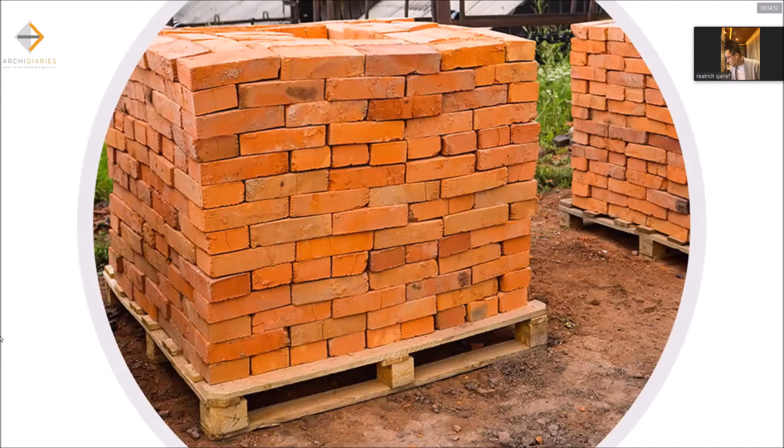So first of all, the language of brick. One brick costs about 0.1 dollar, 10 cents per brick. But when we come to various bricks, it's happening - when we have the good grade of brick, it's like 0.3 US dollars per brick.

So when we see this, the bricks become - the philosophy becomes a wall that is alive. This project is called the gateway to spirituality, in this kind of reflection to the retreat. The owner is really, really generous.

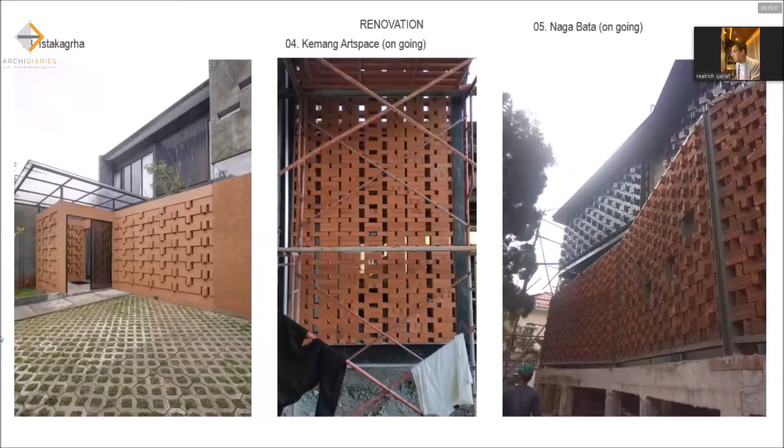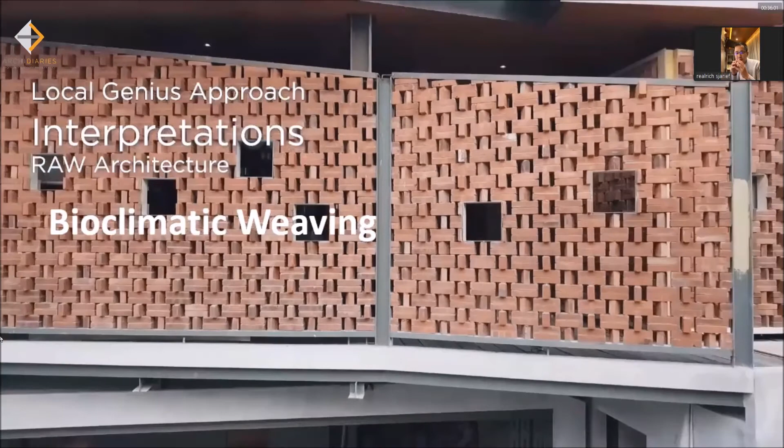The weaving language actually lets you create not only aesthetics, but also sun shading towards the space, involving the art of constructing the brick.

By understanding that, we only create using perforated steel, which is usual, not industrially cut. And we can create simple massing, using primitive structures, meaning primitive massing.

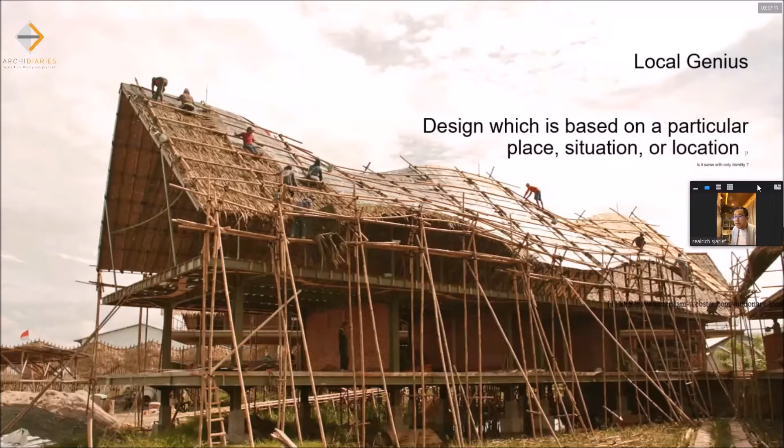So that's the kind of language that I think is one of the keywords I want to start with: local genius, which is design based on a particular place, situation, or location. And that itself is sustainable architecture, I think.

Many people say it's political, many say it's just a jargon or just branding. But for my side, it's not. When we say the goal is sustainable architecture, we already have this kind of awareness.

The idea is all about the limitations imposed by the state of technology, and it's already an organization of the ability to organize to achieve the needs of the future generations after us.

So I will start to present 3 projects and 2 more epilogue projects that I want to elaborate here. The first project is called the Guild, which means the craftsman guild, involving the situation around our studio.

This story is all about the red ant and the black ant. The red ants can be offensive when threatened, but the black ant can defend against attack by running very fast.

So that kind of continuum, I think, is part of our mind - sometimes we need to be aggressive, but sometimes we run and need to adapt to the situation. So the symbol of the nest itself is all about the defense mechanism.

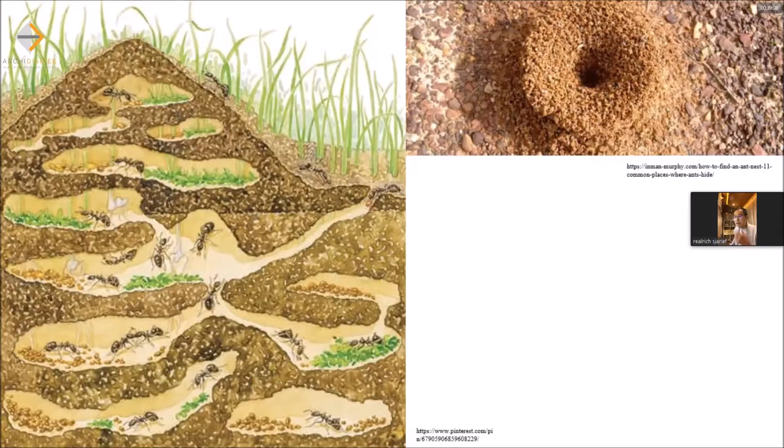By having that, I will start before the Guild projects - we started the project in the garage, in the middle of a gated community, with the discrepancy of high density and low density.

So this is the house - and beside the house, it's actually a very functional house. This is the entry of our garage, which means we provide the studio with many books, with material catalogs, trying to understand.

This is like 10 years ago when we didn't have so much space, and we just made use of the space. Along with this, it was just young people, not senior people.

A lot of people who just helped my grandfather and my father hadn't joined the studio at that time. Just after 2 or 3 years of the formation of our studio, we had the chance to be together again.

So by having that, the situation was quite intense, and we formed this kind of tubular life along the old buildings. We had discussion time forming modular structures by plywood.

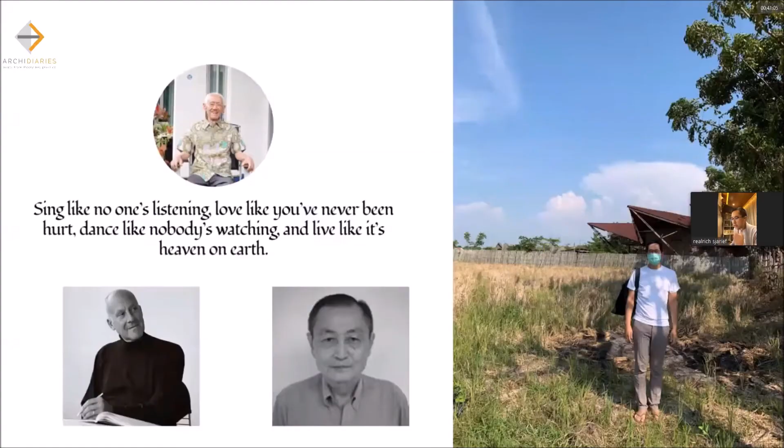We create what's available with the carpenter. So we hired two carpenters who help our studio as a way to service the client as well. By having that kind of language between the people who can make the carpentry works, we're already quite creative in the matter of how to make the designs.

Looking for the people doing research through the manuscript, and including Lord Norman Foster as well. It's like a catalog updated every year, doing archiving for his work and evaluating with the critics.

My father always said, if you have problems, always go to the basics. So you need to always strive for excellence by doing a good process.

From all three of them, we can say it's kind of coined by my father, like: sing like no one's listening, love like you've never been hurt, dance like nobody's watching, and live like it's heaven on earth. By having that, we can have this kind of chemistry between us, a chemistry of respect.

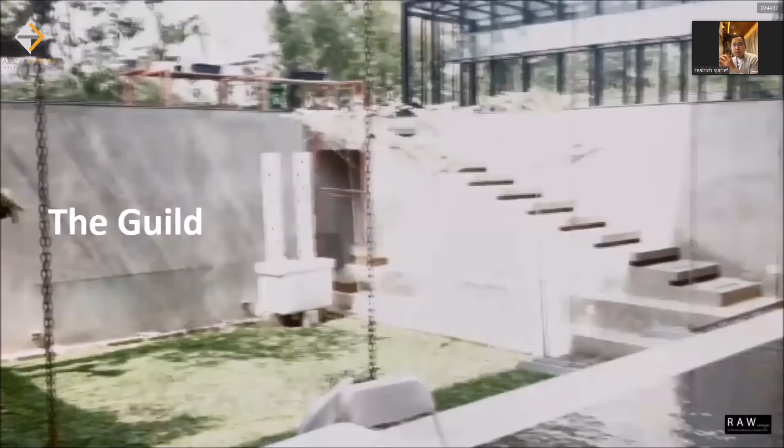But by having togetherness in thinking together, thinking through together, I think these compositions make it quite beautiful in the process. We are not aiming for the products, but in the process we can see these explorations help us make more experimentation in the tectonics grammar.

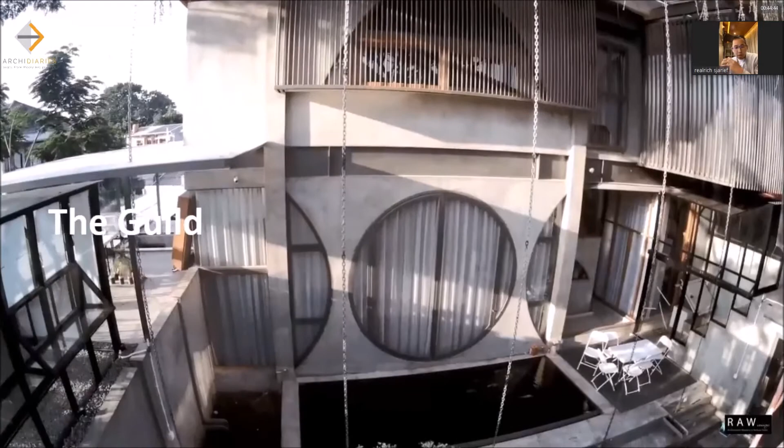We see this as a combination between complexity and a lot of contradictions between one to another, and we can see this exploration coming to primitive compositions like an arc, a triangular form. From that point of view, we can have a combination between big massing and small massing.

In order to get that, we create a more progressive methodology from the massing to the materiality, and we can talk about it later, like a 7-step methodology.

When we talk about the methodology, when you see something like this, nobody will not smile. Everybody will smile, looking at the story of process, the story of happiness along the team, and the story of the process of making architecture. That's what we try to celebrate in this kind of bricolage.

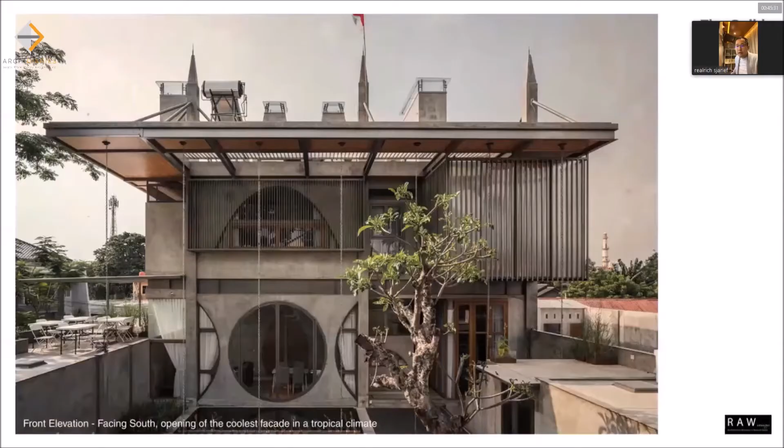When we say this is the south side, we can open the opening to the tropical climate. On the left side is the north side, and in the middle we have an atrium.

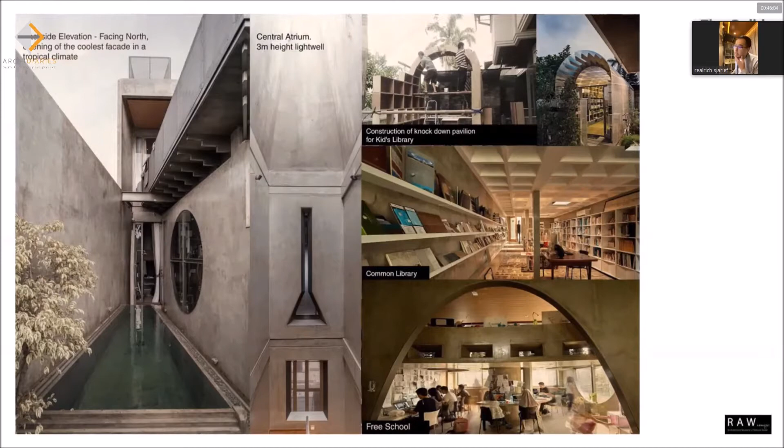These compositions are the plywood summer pavilion, which was actually moved to this new location, and it can still be used. It's already been moved 4 times, and there is a common library and free school inside the guild, as part of the internship programs.

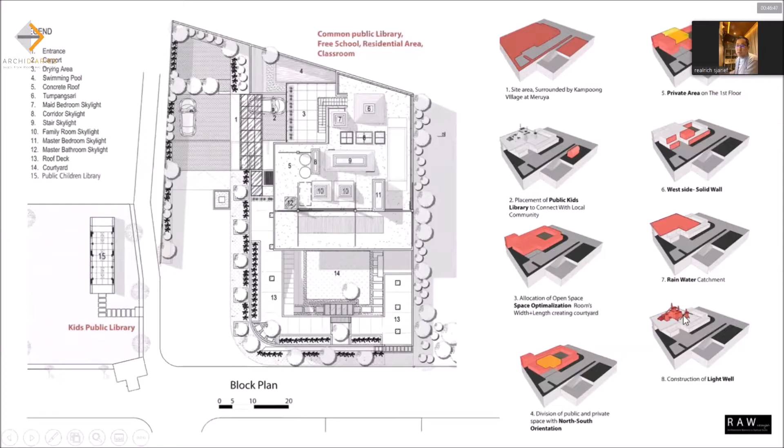This is the construction of a light well and rainwater catchment. This is the sketch of the building from the west side, and you see the facade is actually solid, no openings, only openings with perforated panels here, just for people to sneak a peek outside to the studio.

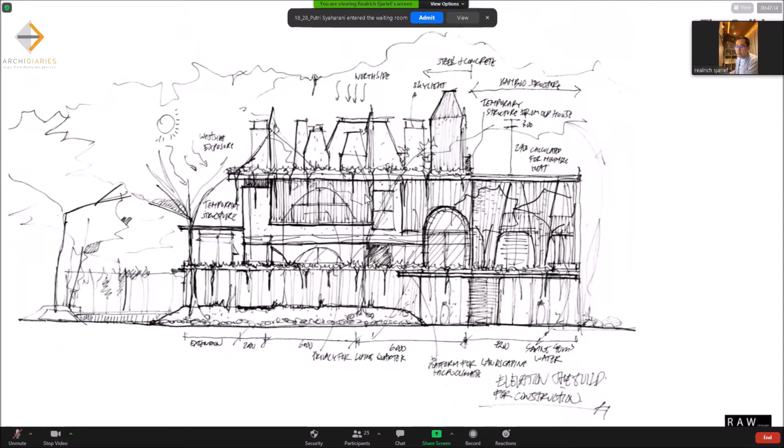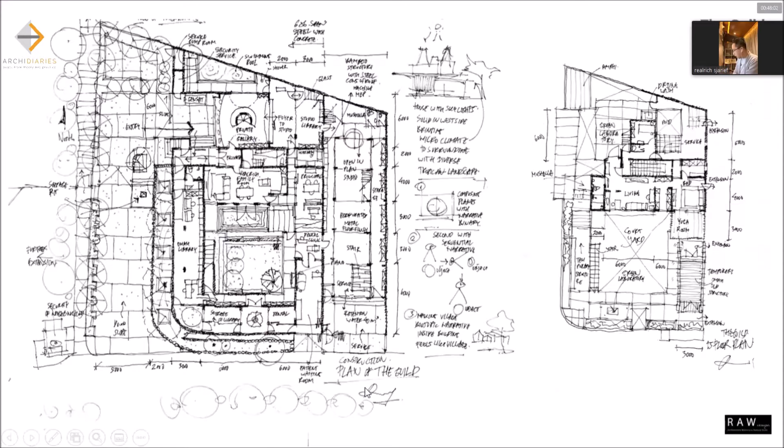So this is the construction process when we try to have the locality, like steel workers constructing things on site and in the factory. By having that kind of attitude, we can have a bricolage using the interpretation of the vernacular constructions, like this thing the craftsman never done before.

This kind of light well going through the buildings, so by having this kind of thing people can appreciate the architecture through the lights and through the construction techniques, and through not only the forms outside but inside. So it's more essential, not only the literal things.

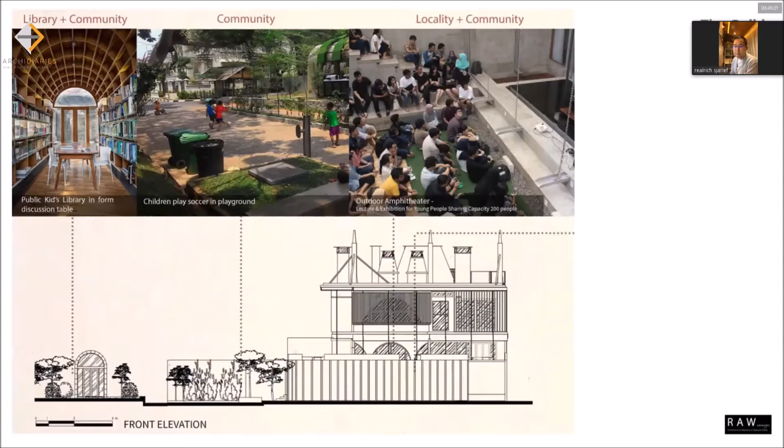So this is the activity happening inside the studio when we have the community, the architecture community, or the amphitheater in the form of Pecha Kucha. And the library and community becomes a public kids library.

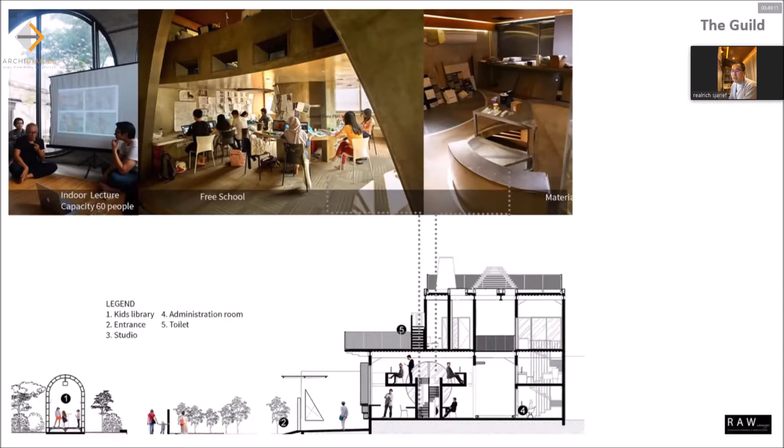So we have an indoor lecture and then space for the gallery, and we have the retention water placed here for the entire site, ranging for a radius of 50 meters, not only for this building but along the surrounding buildings, because this area is already quite flooded, and we put a retention tank just below the surface.

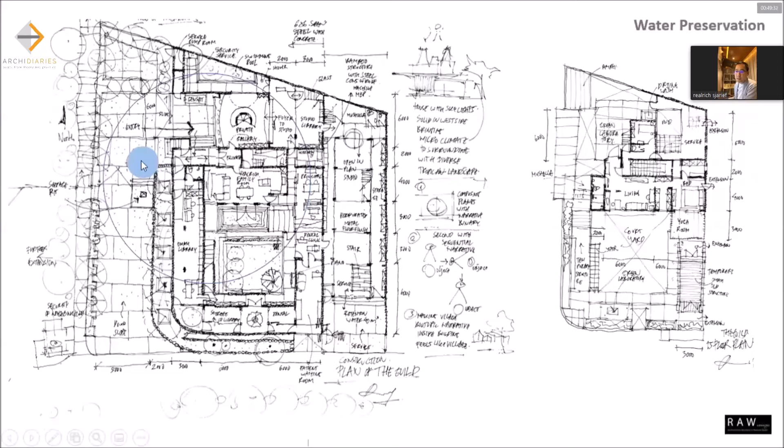So this is the type of tectonic grammars that we already developed at the beginning. This is the first language, the second language, the third language, the fourth language. So everything is quite intense with minimum cost, maximum aesthetics, how to create very local materials to gather light, and then very easy tectonics to put inside.

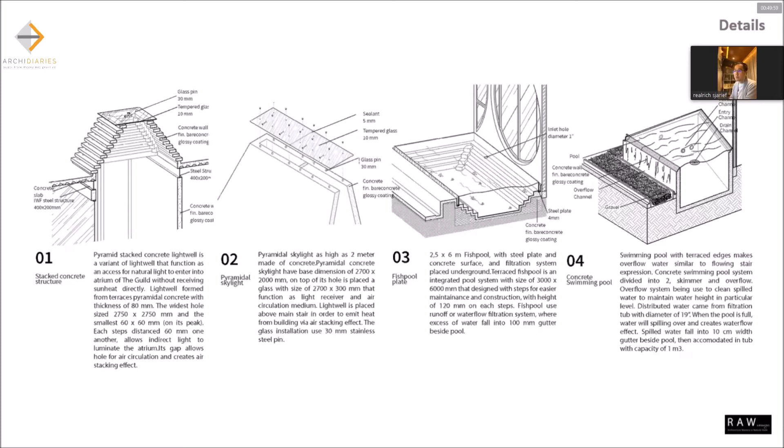So this is another language. This is the final form of the Tumpang Sari, forming very soft lights coming from the side, and then this one is to gather the structures, and then this oculus form creates this kind of quite aesthetic for the site.

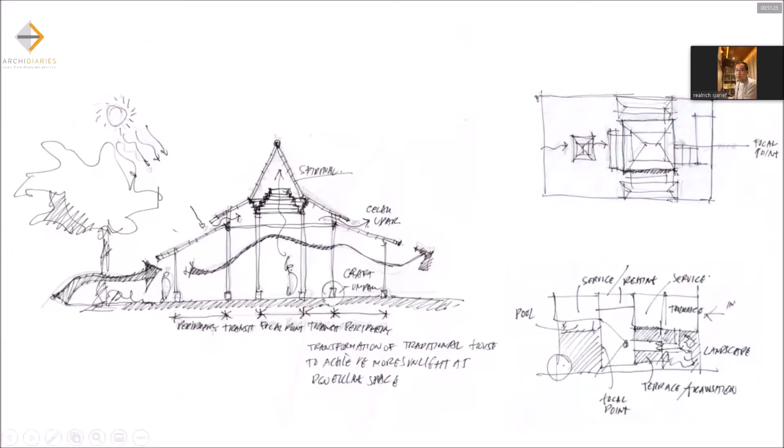So by having that, we create this kind of composition, like during this simple massing, in modules of 3 meters by 3 meters, we can get this kind of combination of the light well massing by entrance to the side, and you get the focal points, and you have the backside points, and it's simple as that. And all of the rooms, including the bathroom, have natural light as a way to create some of the openings.

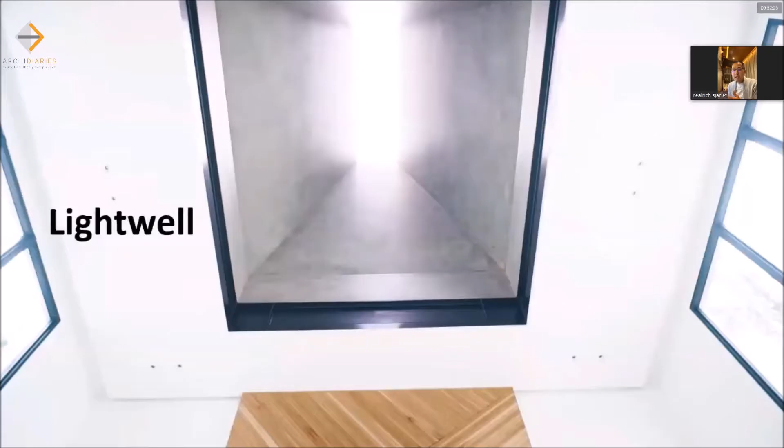So when we have this kind of concept, the tectonic grammars really help us have advocacy with the clients, including the manuscript. We have advocacy to the broader audience as well, through writing books, through case studies, and we spread it and share it with people, without much secrecy, with the frameworks and the methodology of design and evaluation within it.

Because the critics say these things actually bring up more noise. So by having that, we created like a sound reducer for the client, so they can easily rest in the rooms. By having an open discussion like that, there is an evaluation process.

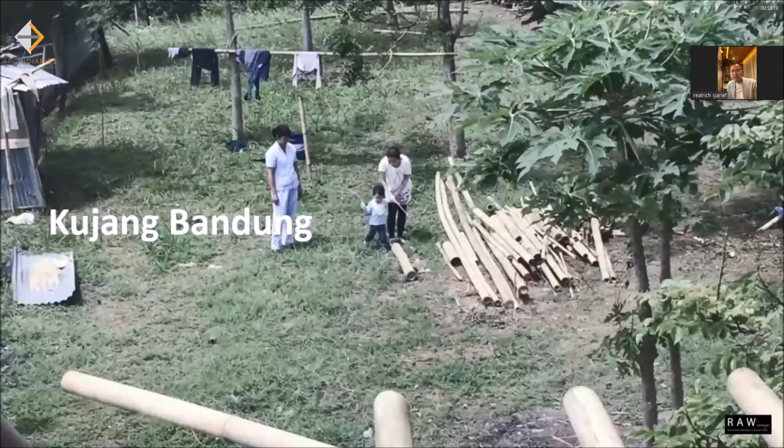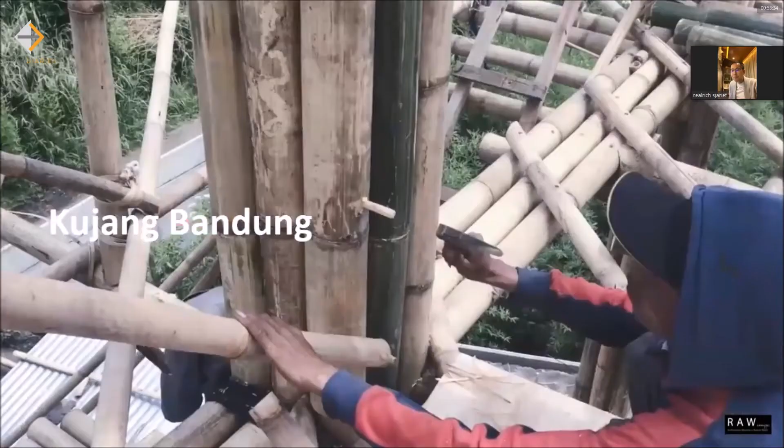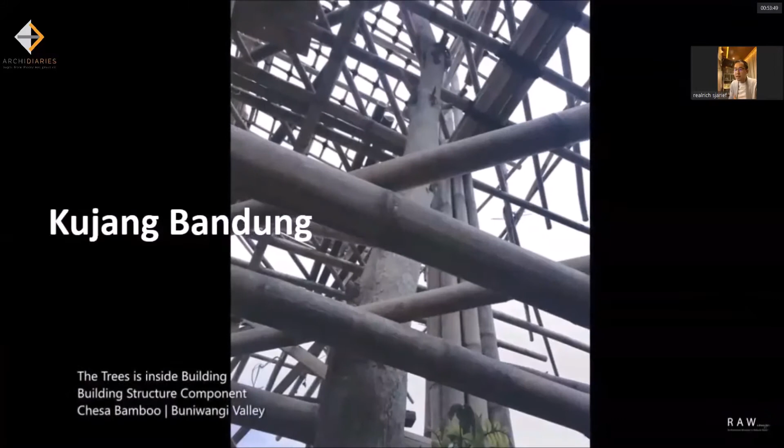In the center is the rectangular shape because it's very easy to form. But outside is the tubular shape because the wind is pretty harsh in this area, blocking and transversing within this building - the rectangular covered with the tubular. In the middle we have a tree holding the structure as well, because the tree has already been there for many years, so we want to use it as a holding structure.

We have this kind of interaction with the bamboo craftsmen, which is very beautiful to work with. It's very exciting to work with this kind of craftsman technique, like carving, which I think is a high level of art. When we create this kind of mixture and combination, it becomes a fulfillment in our relations and collaboration with the people. So when Ayas said it's a collaborative practice, it's true - it's a collaborative practice.

So the form is like that - tubular, with a service corridor in the middle, so it's protected. The bamboo structures in the middle are protected by the tubular structures here, covered with plastic - so it's like what I call a dead material, and inside is the organic material.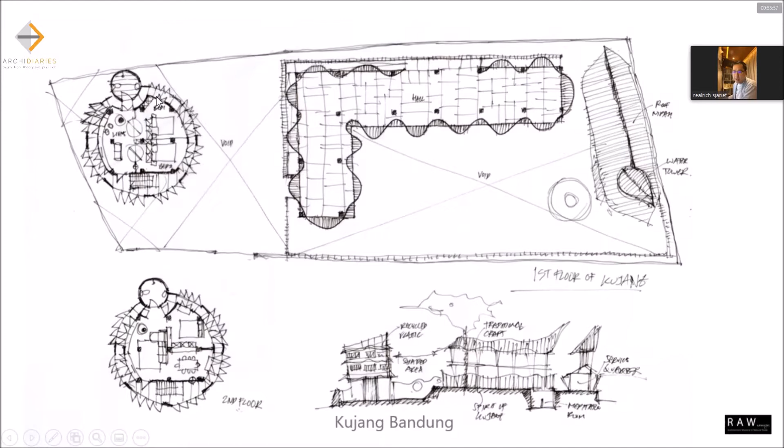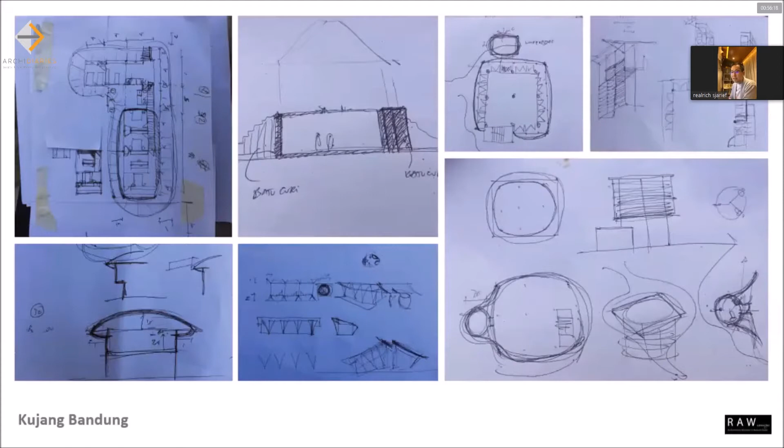This is the first initial working drawing. We collaborate directly with the craftsman. So this is the language, using 3 meters by 3 meters by 3 meters, and we create a circle like that. By having that relation, we can get these kinds of forms - connections to the plastics going to the cantilevered long roof, supported by these 3 bamboos here to shorten the cantilever.

This one uses concrete poured with glue and wooden powder, and we can reduce the structure of the bamboo. This one uses steel, with steel inside, covered to create an underground praying room or space.

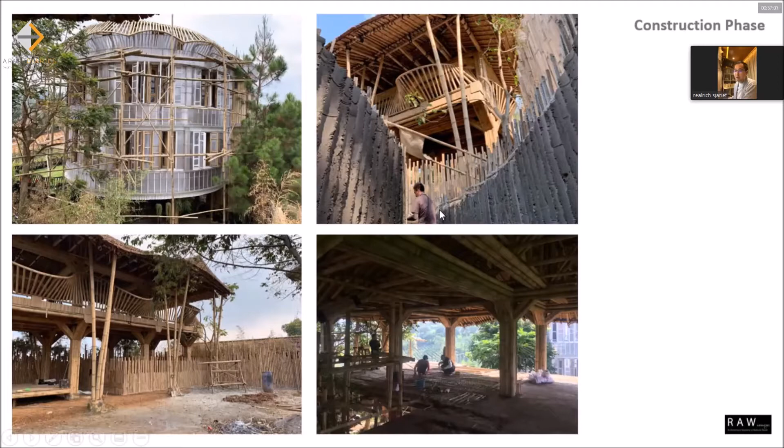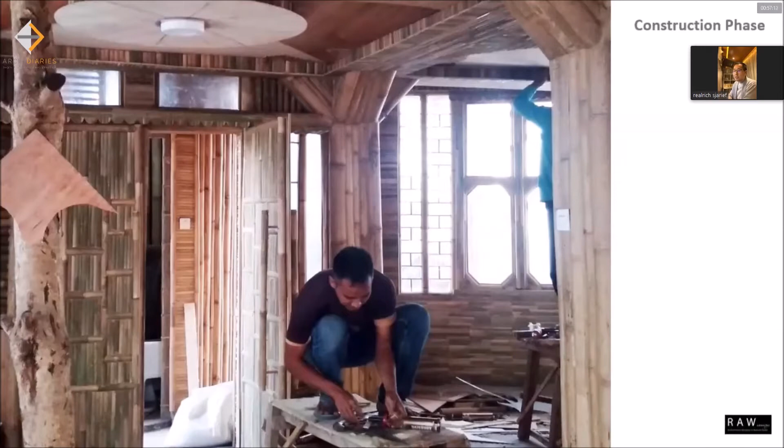So these are the situations - carving craftsmen carving the bamboo, placing the composition of the bamboo together, and it becomes like a language of the space. You see this kind of door - it's a bending door, and it's not easy to bend. You need to slice it a bit and glue it together with the construction, and engineer all of it.

And we made it by ourselves on site - it's not industrial, we put it together. The only industrial element here is this one panel, like a GRC panel, because it's flat.

It helps to cover the soft parts, and there's a lot of mechanical things inside. This one is like the wing rotations, openings just to help us create a solid that becomes a void, to create the privacy.

This kind of composition really helps us understand that there were some boundaries before in our practice, between the craftsman and our universe. But by having this kind of execution in this project, we kind of unlock the boundary and understand it within the project even better, by having this total craftsman architecture.

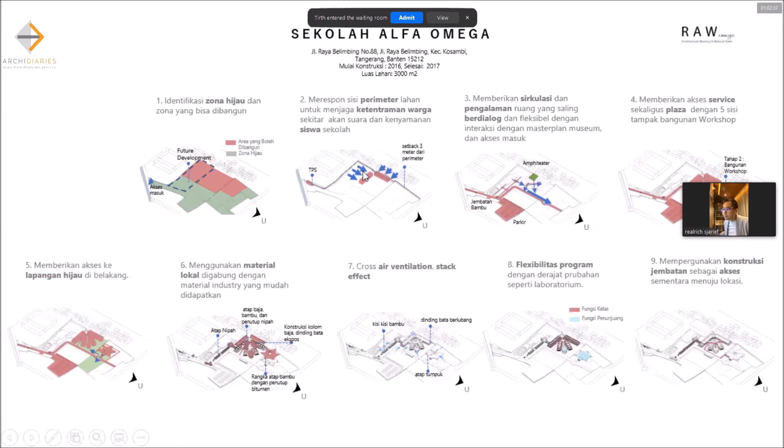So by having that, we try to connect the connection with a bamboo bridge as a construction worker access, which has become a permanent access now, because the client liked it and wanted to preserve it, even though it was already for temporary purposes. And by having it in the middle, we can have a circulation, like a finger, and when you're standing here in the teacher's room, you can see another area of the school, and it becomes like a defensible space, so people can look after each other.

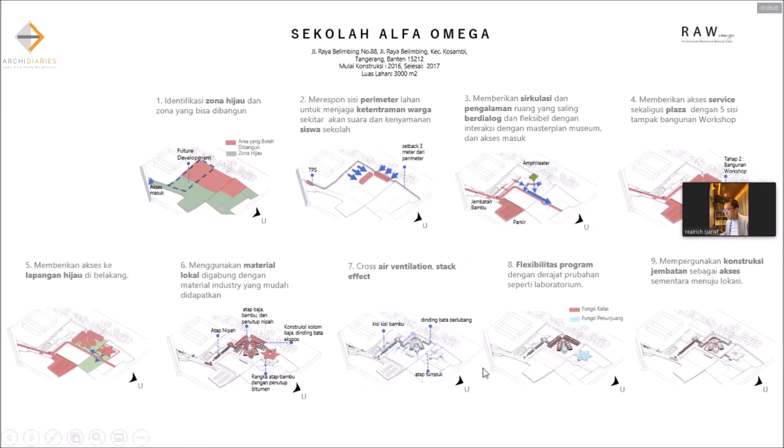At the back is the workshop rooms, and the combination between materials like steel, bamboo, nipa, and bricks actually made the building. So these are the challenges, like the flooding every year, and how we make the building just with material that ranges within 5 kilometers from the site, combined with modular structures facing the high level land.

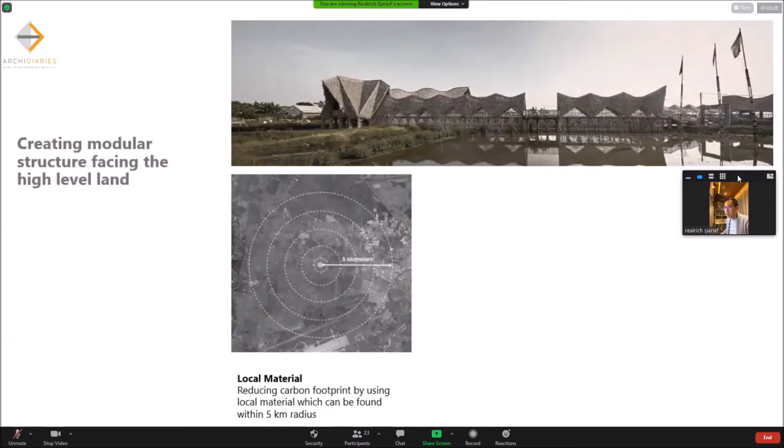It's all about the combination between brick and steel in the floating structures, combined with a 1.4 meter height. This way, when the students sit, they can see outside, but when you're walking here, you can see inside. Actually, we have a hole here, so the noise — sometimes when you're very loud, the class outside can hear you. So here we can get tolerance within the school environment, so people can hear the other people in a quite good manner, when it becomes too loud.

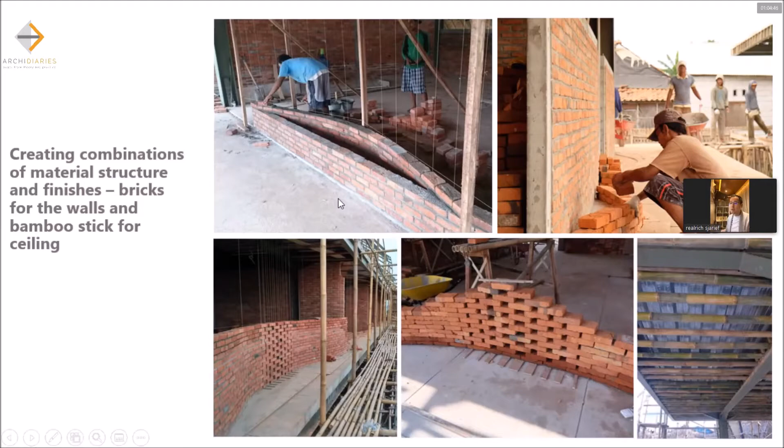So when we see this, it becomes an activity of space, becomes permaculture, the space becomes alive. There's a combination between the bricks and the more ergonomic space created by the curved bricks. The concrete here is not finished, it's only poured and kept flat, and that's it. So it's very raw, and this brick as well is very raw, there's not so much finish. This one we discussed with the structural engineer to create lighter structures that can hold itself.

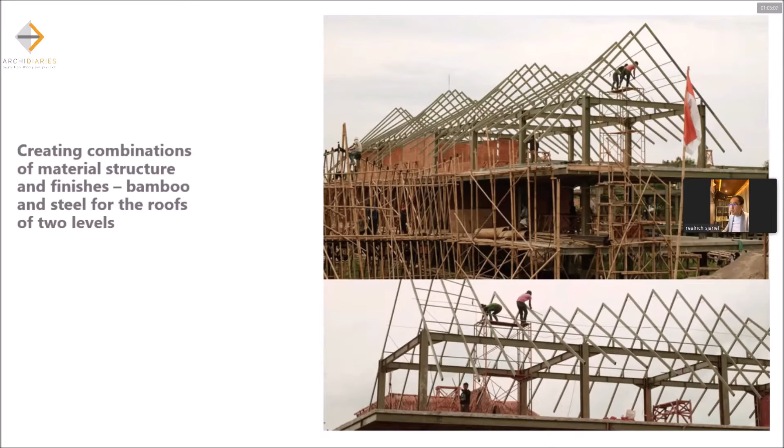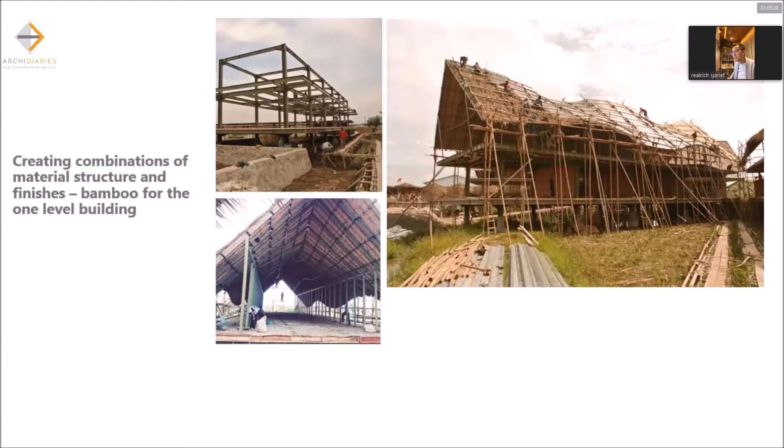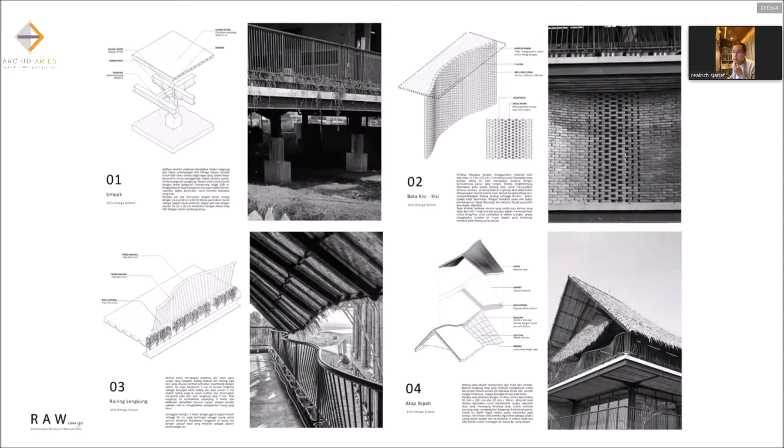And this again, we came up with the tectonics grammar, and with the client we had meetings - as far as I remember only 2 to 3 meetings in these projects. So with the client we created a tectonic grammar, and the client approved it, and we just built it. It became the language of this school, and we made mock-up after mock-up to make the client agree with the grammar we provided.

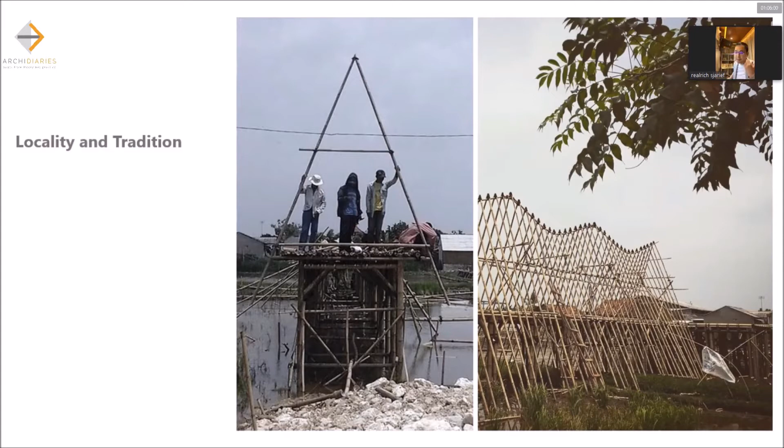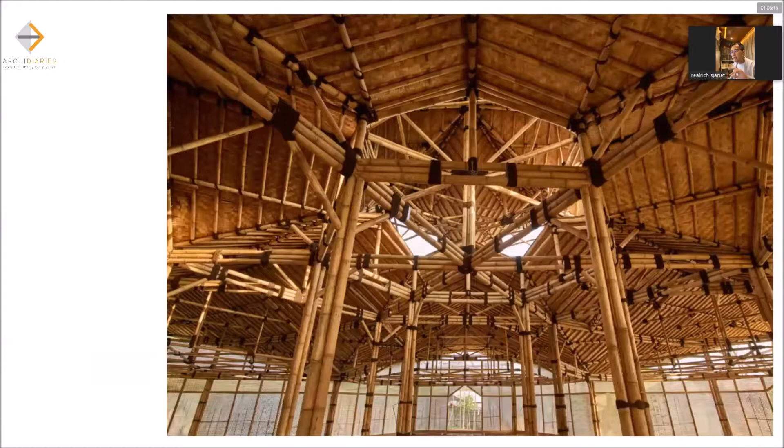By having that, I think we carried the combination of material, structure and finishes from bamboo in a one-level building to two-level buildings, and in this part we use steel structures. By having that, we created another building at the back called the workshop building, because the client was very happy with the bamboo building performance, and they wanted us to create a building at the back for the workshop area.

Then we created one in the middle, the atrium building, which creates an air stacking effect, so the hot air comes up and goes out of the buildings. This is the construction drawing that we made - not drawing, but a model. So we created this kind of model as a structures model for the buildings.

So these pictures show that actually the building itself is floating, but after discussion with the owner, it was decided to put more heavy equipment in the workshops, and this one needs to be braced by the stone construction.

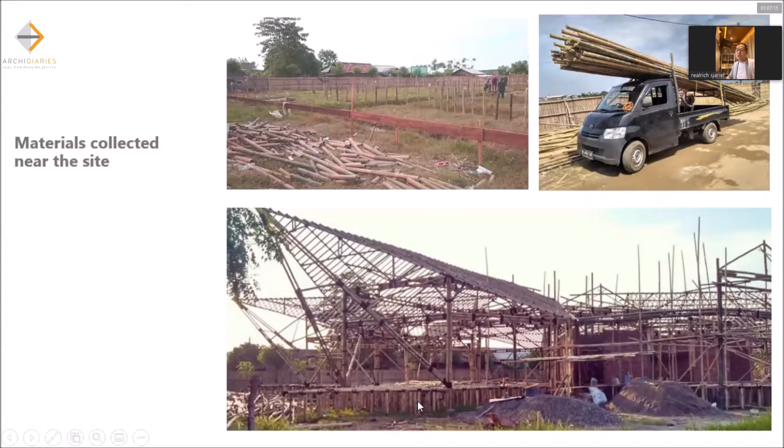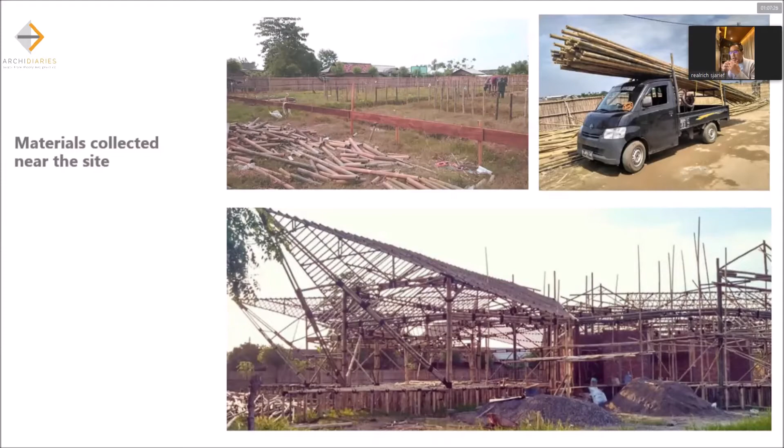You see, when we have this kind of relation and chemistry, it's not common, it's more like an adaptation. So architecture for me is kind of alive, like adaptive and responsive between one to another. So it's quite changing, it becomes like a changing thing, you know, it's transforming when you see this one.

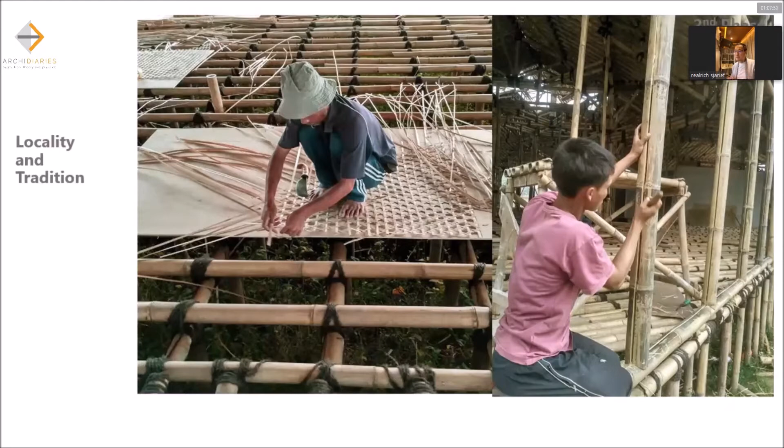The leveler - we as a leveler try to work with what's happening available on site, and we try to maintain all of this bamboo. We use it until the limit, you know, until we're weaving the facades, and with all of it collected to site, we try to draw and put

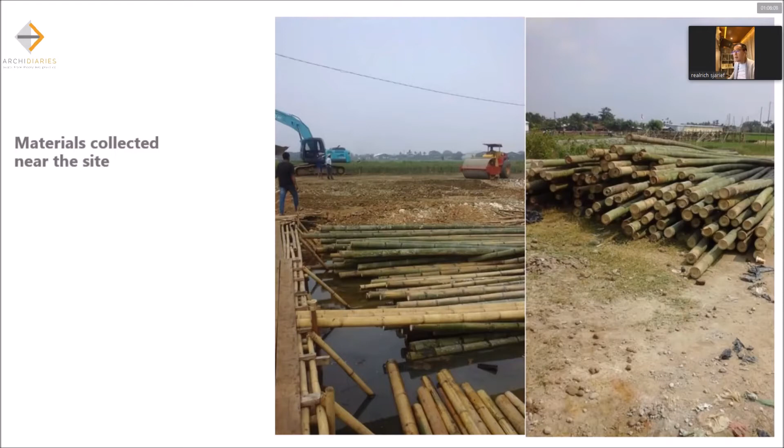natural preservation for the bamboo, and with all of this kind of tectonic grammar in terms of joints, we're still collaborating with the bamboo craftsmen. So actually we're working backwards with them - we understand the traditional technique using bracing and using the rod, and we try to implement these new techniques using glue later on.

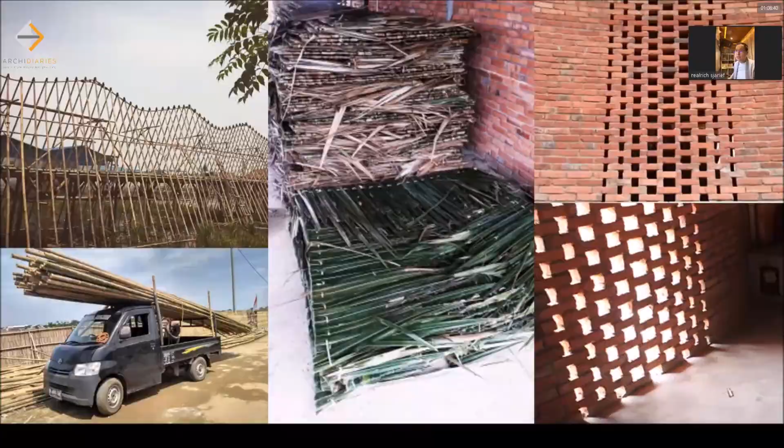So this kind of forming a language which is not simple - not only brick as brick, steel as steel, bamboo as bamboo, but it's like a whole new adaptation between one and another. So this is in a grid, matter of grid is very simple. In a grid of 6 meters and 2 meters, you get the multiplication of the forms. But how to place it, the primitive form becomes very important.

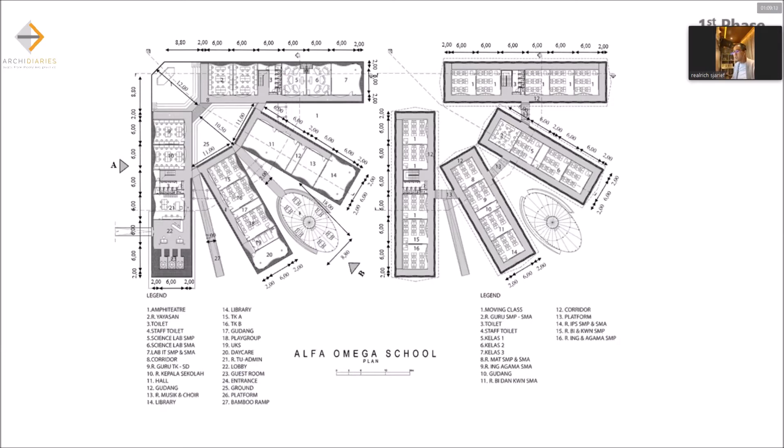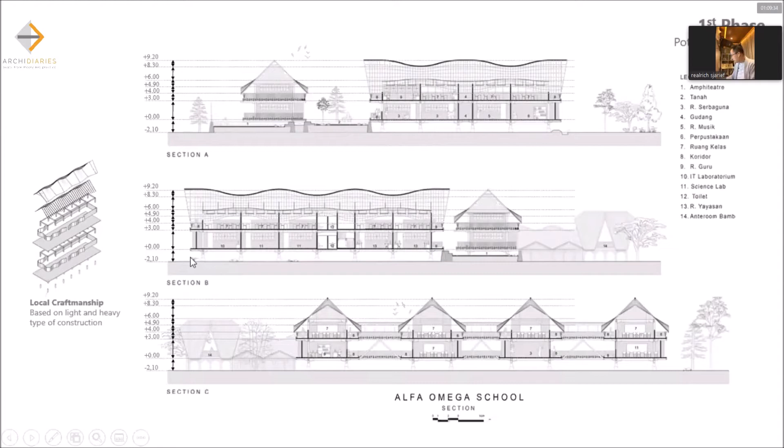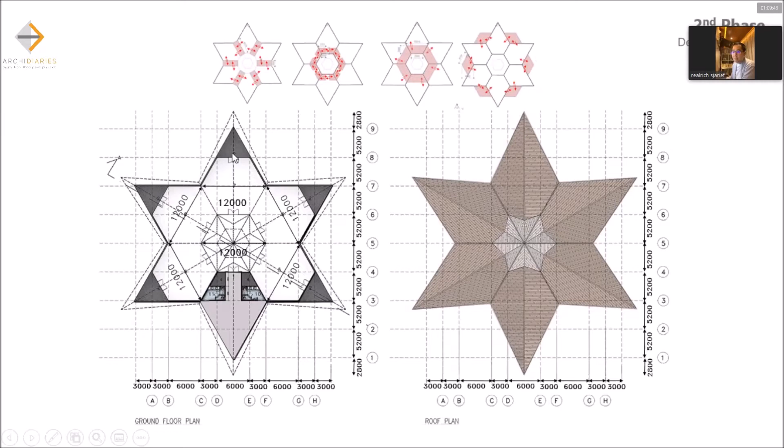So this one shows the floating structures along with the cross ventilation going to the side - in the matter of the floating structures, 0 and minus 2.1 meters, the structure is floated 2 meters above the ground. This is the principle of the inside and outside. We have a combination of 5 workshops, and from the inside we can access the atrium. So things like that are happening.

So I come to my last thoughts about the project. This project is called the Bamboo Scapes. This one, the skin has been changed like several times.

Now it's up with the gray, and just last month it's covered with the color of the bamboo again. We maintain to get a finishing color like bamboo. It's not, but actually inside is bamboo. Why is that? It's just for the protection of bamboo itself - it's a part of the camouflage.

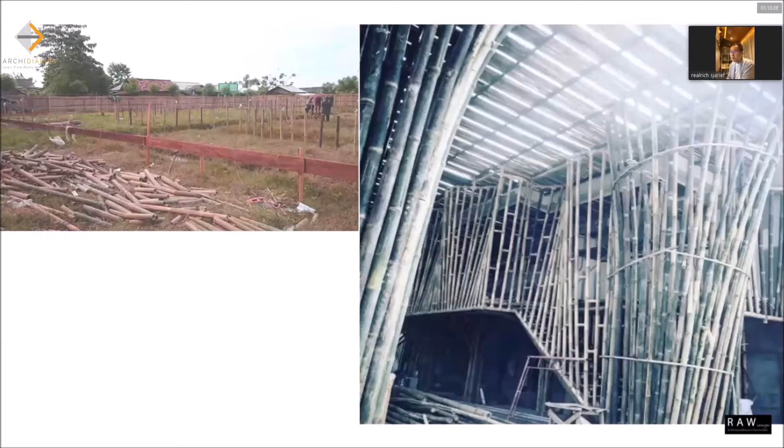Basically this project comes from the recycled projects in Alpha Omega projects, so it's a form of the scaffolding project. Actually it's a studio, it's an office, and it's an auditorium at the top. So it's forming like a 2-story below the surface, because this one is the heartland.

When we try to dig the space we come to see that, okay, this space can actually be used. And by looking at that, we can have this permanent structure underneath, and then the more adaptive organic structures on top of it. By having that, we can create a totally adaptive concept between one and another.

A lot of grammars being exercised, like singular doors that can be accessed by 2 people, that can be accessed from both sides. And a lot of big columns forming trees that actually hold the roof, and this floor plate using bamboo structures.

So this kind of screed technique that we use is on top of many layered bamboos, so it's actually like transforming. Before we used this floor plate, we tried to test a very thin concrete combination with wood powder. So actually it's like that.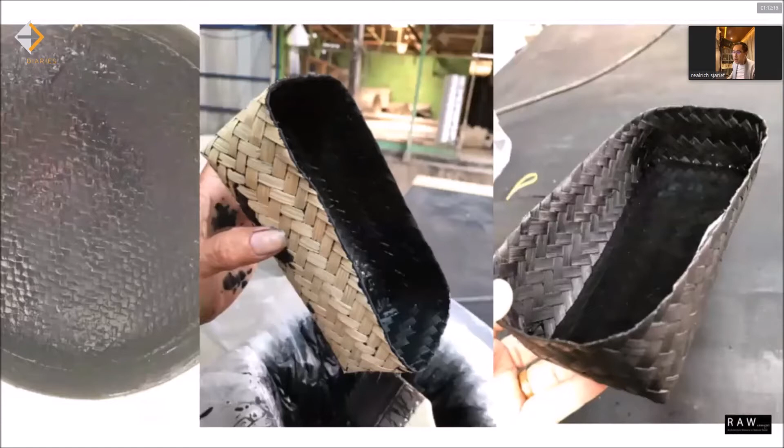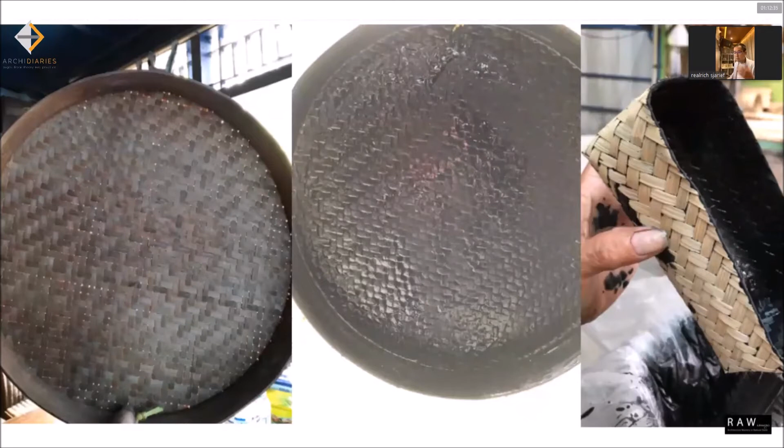So by having that, we are having collaborations with chemists, having this polymer for waterproofing for the roof. So actually we're in the progress of creating this on top of a layer of weaving brick bamboos.

So by having that, we get these forms by combinations of columns - big columns like bamboos - and you can create on top of the concrete underneath, and we can get adaptation between organic and more industrial.

By having that, this is forming a new guild, and this Guha bamboo becomes like a Guha complex, and then this one is the craftsman's - the Pa'ano, it's actually what we call it.

We have several tribes in our office now helping to build, manage, and collaborate with us, like having this very simple gardening, very self-sustained, where we can put the plantings in vertical forms, and these plantings help spread all of these seeds to the other people adjacent to our buildings.

So by having that, this building is covered with wood. Before, we used to cover west-facing walls with concrete bricks and cement. Now we have it different - by covering the west side, it's not only with industrial material, but you can have living material.

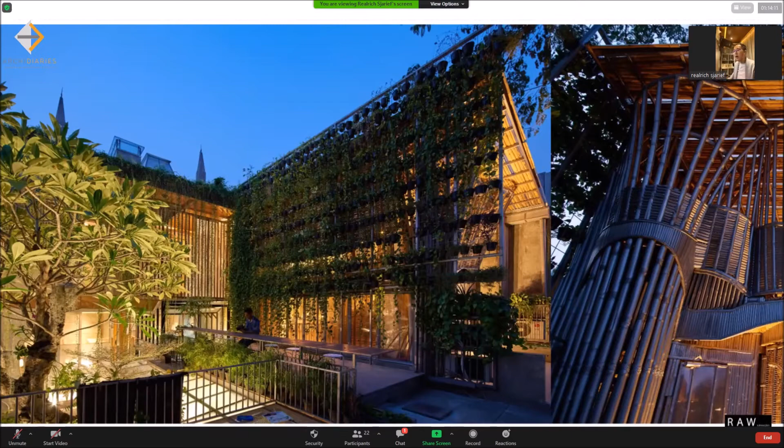And we have this new grammar alongside our studio. This new grammar, like this sliding door made entirely of bamboo, covered with transparent plastic. Things like that, by combination of the three structures, and this kind of opening of the entrances becomes like a language of the curve.

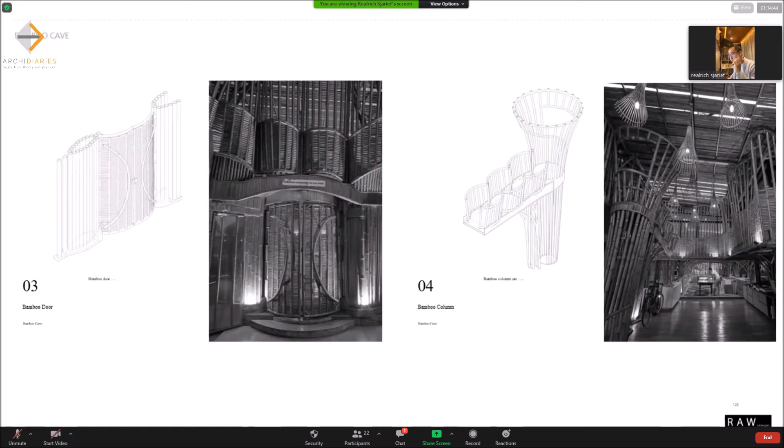This very curvy linear railing becomes this, like I said before, where 2 people can go in and go out at the same time. So it's this playful ambience that we want to put inside creativity.

This is the situation inside the studio, and it becomes the language of bamboo and the language of grammar, this thing. And you see the combination between inside and outside.

And at the end, we can see again these 3 things: beautify the world, oneness with the creator, basic human awareness, ultimate goal of life - which I think is a transformation. You see it from the beginning in the garage until now.

We have to say that we are being very lucky to survive. We call that term selamat. Selamat meaning just survive, meaning being grateful for the little things that we have now, which I think can constitute these three things as a whole act of reflection on these topics.

Being having a selamat meaning, I think, okay, just enough. Today is good, so let's create something good again, and have an understanding that we can spread happiness and goodness. So by having that, that is the ingredients - the raw material, the traditional crafts, the building technology.

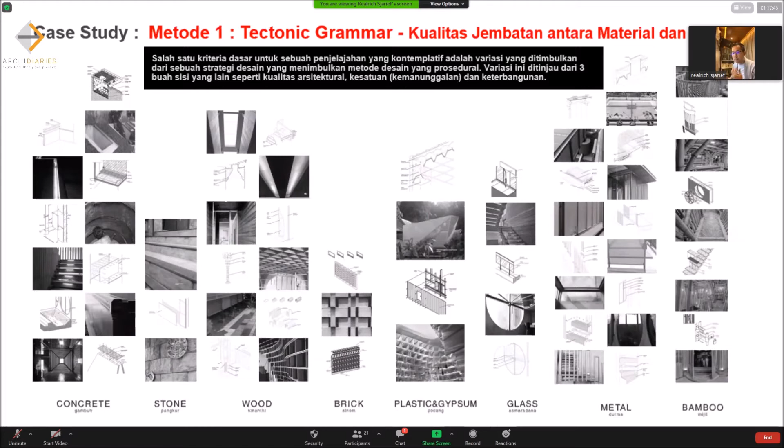This is tectonics grammar, like combinations between concrete, stone, wood, brick, plastic, gypsum, glass, metal, and bamboo. This is one of the tools to have ourselves in this kind of philosophy of selamat, just enough, by having a vocabulary of the material, the tectonics of materials. With this, we have a cosmology between methodology grammar, tectonics grammar, and craft grammar. We start with the tectonics grammar, drive it into the methodology grammar, and then we have to be grateful with the people, which I call craft grammar. Methodology grammar is about the inversion between mass and material to mass, meaning a design mass.

So this is tectonics grammar. It's about the concretion of being a bridge as an architect from real life to the outside material world. But craft grammar is very important. It's all about the artisan and craftsman skill, from the top down and the bottom up. So it's in harmony.

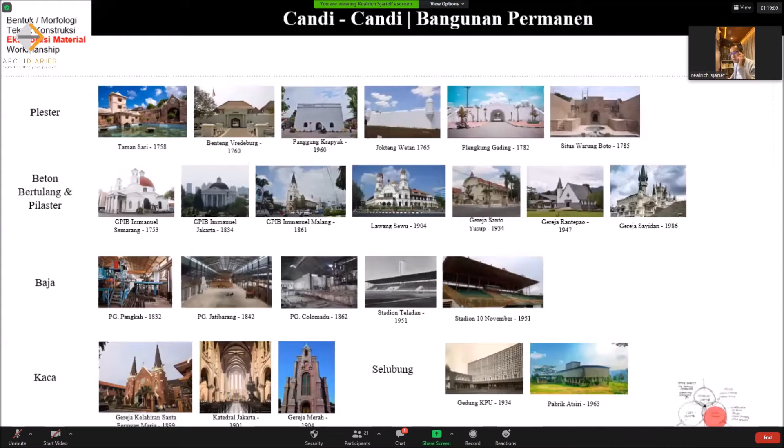By having that, cosmology is the mountain and the beach, Parangtritis, in harmony between death and then born. So we see that Indonesia, and places around the world, have spiritual buildings with permanence, and also impermanent buildings, with this kind of transformation between plaster, concrete, steel, and glass, which comes up into more impermanent material using organic materials, already part of living culture now.

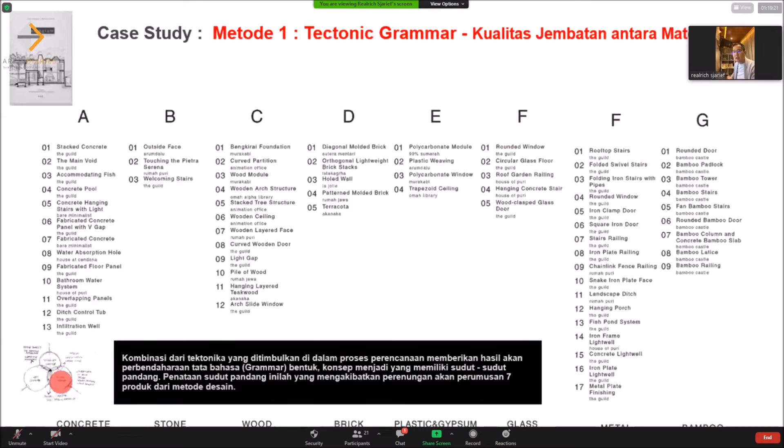By having that, we can create a whole new tectonics grammar between both, because organic material has advantages and permanent material has advantages as well. So by having this kind of combination, we already know the alchemy between the materials. By doing that, it comes into the second rule, which is methodology grammar, done by Mangunwijaya, which has 4 elements of methodology design: physical things, nature things, lights, and energy.

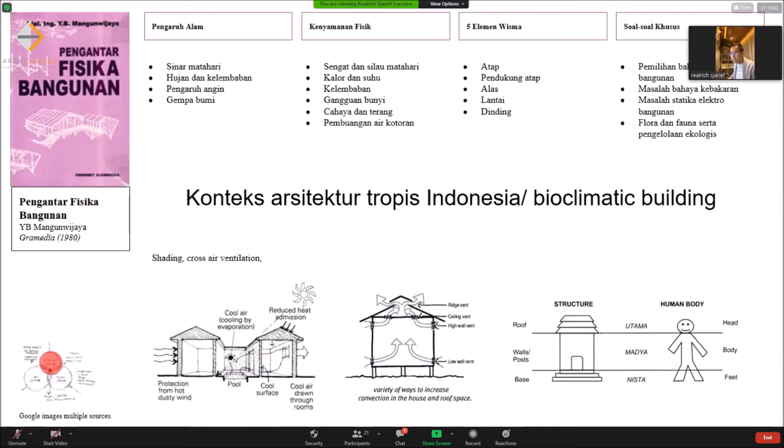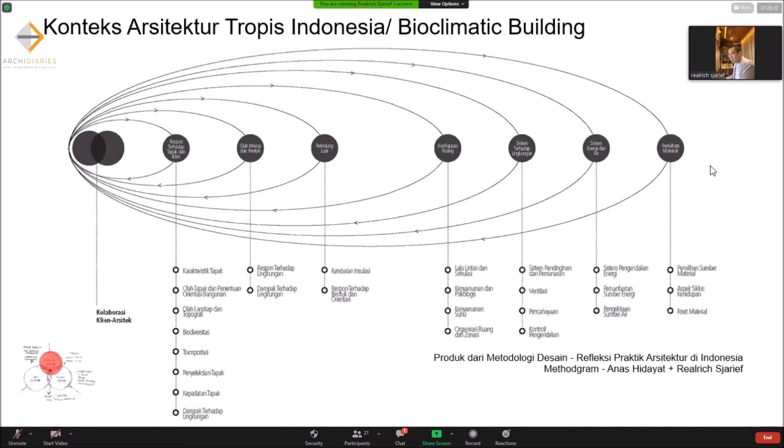When we create this vocabulary, it means you design based on the context first, and continue with the massing, continue with the envelope, continue with the internal configuration, meaning the plan, and continue with the mechanical electrical system, with efficiency of energy and water, and continue with the material. So all of these things start in the conceptual stage. That is the methodology grammar, not done in the design development stage, but started in the conceptual design stage by having a grammar, a vocabulary of details. This helps us know how to involve this kind of holistic implementation into...

...collaboration between the client and architects. So this is the whole of the regressions and progressions. These are the types of methodgram we have published, and the last one is tectograms. By having that, we can have this kind of tectonics grammar. So this is methodology grammar. You combine the tech into one, and it becomes like an architecture grammar.

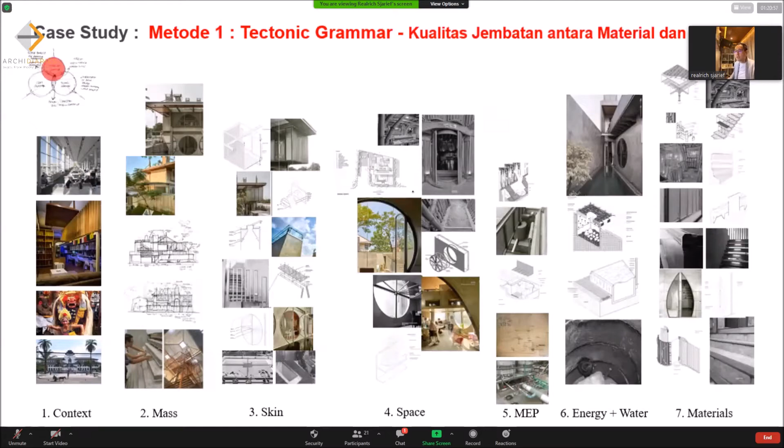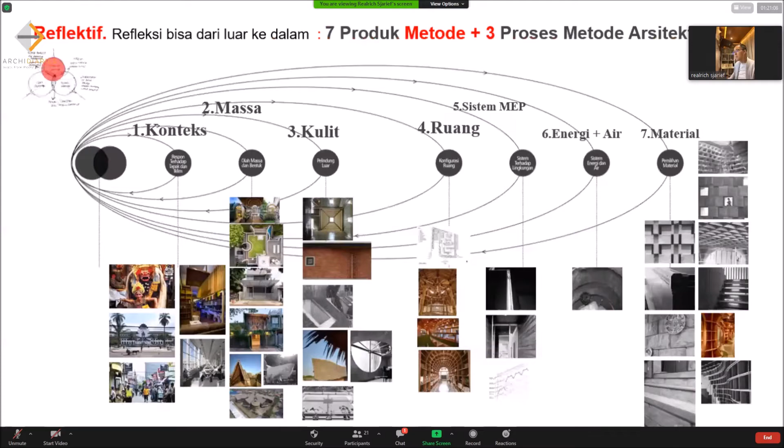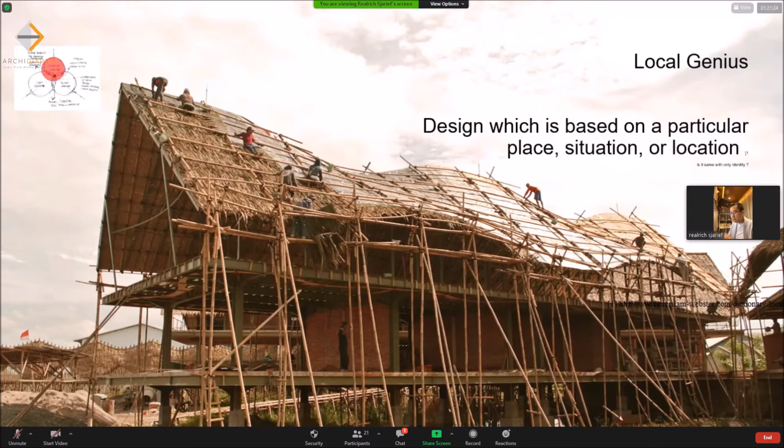We can create a carbon neutral, waste-free, and carbon-free city. Between that, we have tectonics, design methodology, and craft grammars, we can create guna, citra, and missions. And then in Indonesia, we have this coin, gotong royong, like togetherness.

I think this architecture, our architecture togetherness, like India and Indonesia, we are brother and sister. I saw the beautiful work by Sankalpa, and a lot of Archidiaries, which I think I can really learn from the presentations, and a lot of discourse between the actors. A lot of us need to have this creative and critical discourse inside our professions. So by having that, this is a form of gotong royong, which I think is very beautiful, from the big to the tiny, from the small things becoming big things.

It's a form of bricolage. However, this form of bricolage needs the involvement of various parties and needs transparency. So for me, I'm in progress to be more transparent, involving many parties inside the design process and inside the construction process, inside the many processes, inside the architecture.

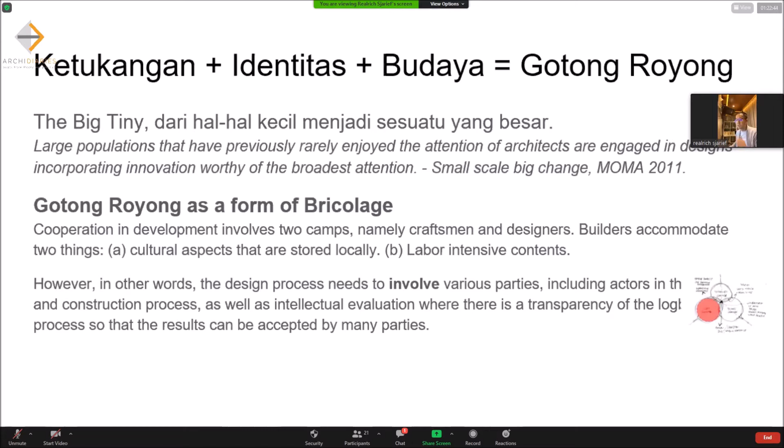But I think this kind of thing is very promising in the future. So I think this is going towards something in the cosmos again, in harmony towards the total architecture, carving a wisdom in our own limited time in this world. So I hope in our limited time in this world, we can always share this kind of moment of the beautiful process. Not only my process, for example, as an architect. No, it's not my process, but the process of togetherness, forming this kind of very beautiful process of architecture.

So I think that's concluding my presentation. Thank you for listening, everybody.